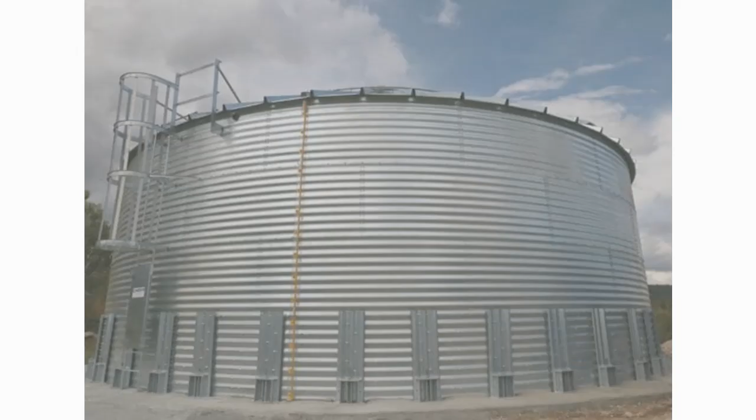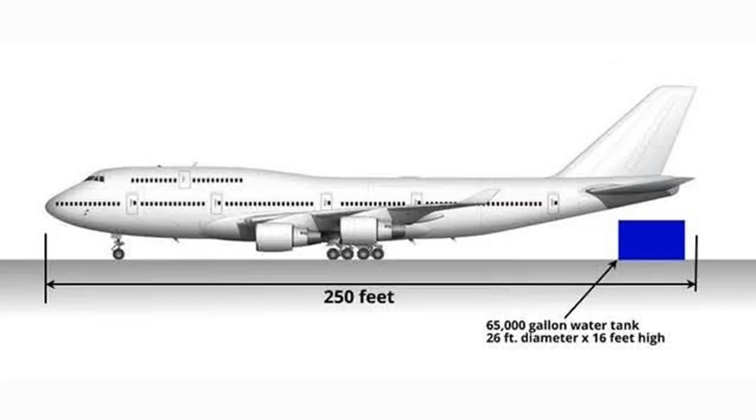I'd like to address this myth about aircraft not using fuel, specifically commercial airliners, and set the record straight using real world examples, references, videos, and a bunch of other proofs that seem to be overlooked when discussing this topic.

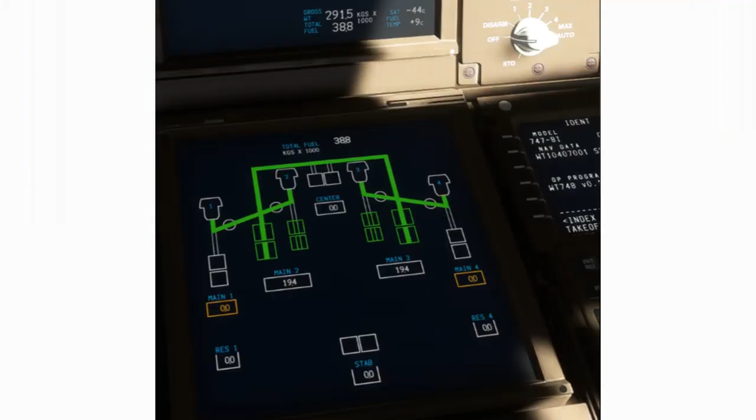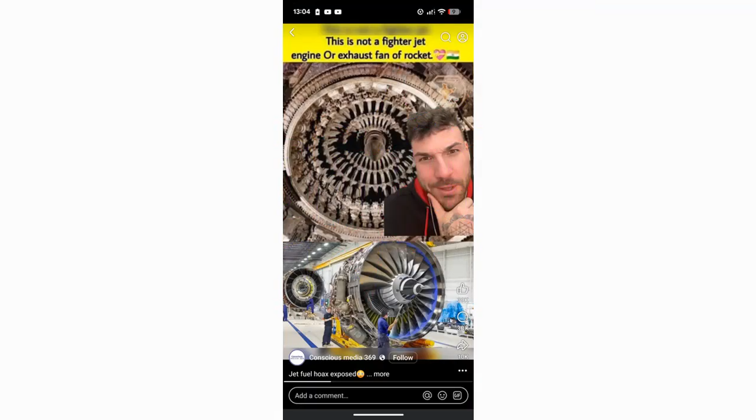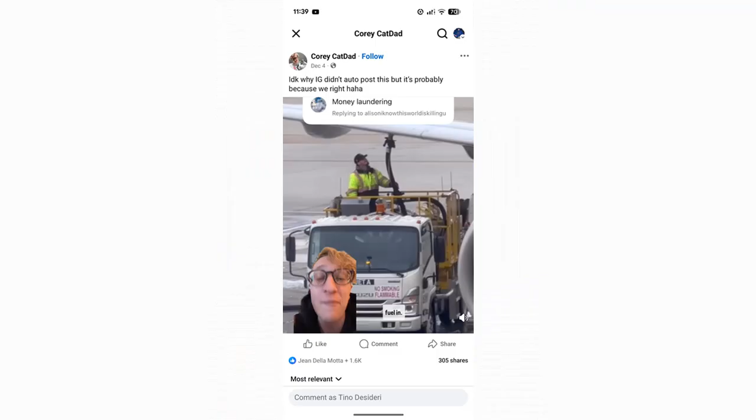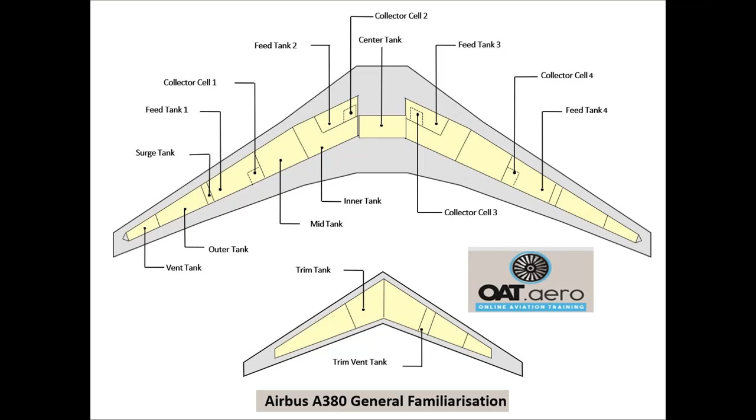I've picked these four individuals not because there's any hardship between us. I actually follow some of them and agree with most of what they're saying. But I've picked them because they're very prominent in my feed, and I'm concerned that the message they're propagating is reducing their credibility for other messages they're trying to get across. I'm also concerned that some of them may be controlled, deliberately trying to discredit other messages we're trying to put out to help others. After watching this video, I hope they'll reach out to me because I've tried contacting them privately through messages or commenting on their posts. However, nobody has responded to me.

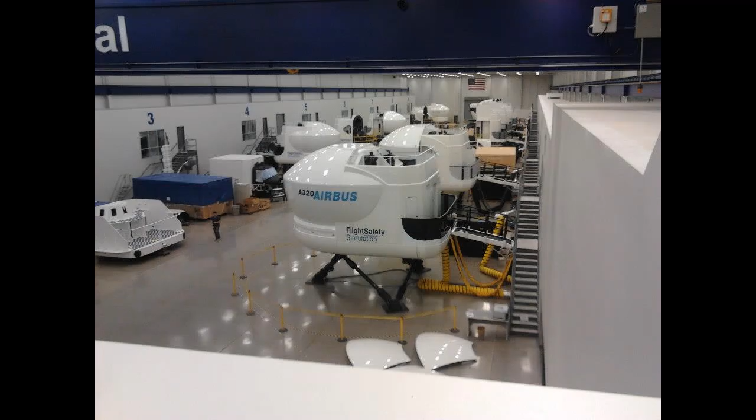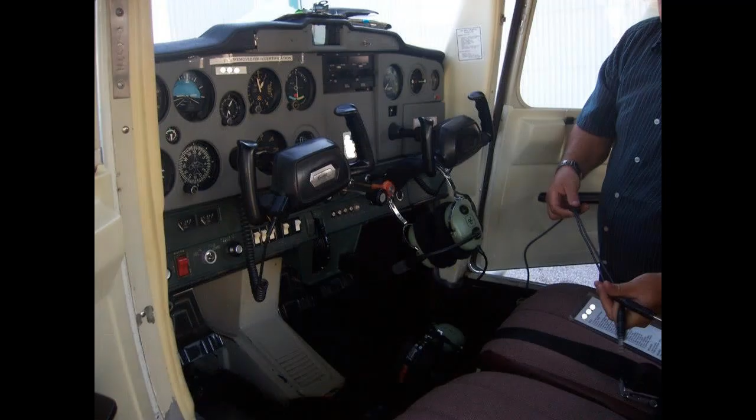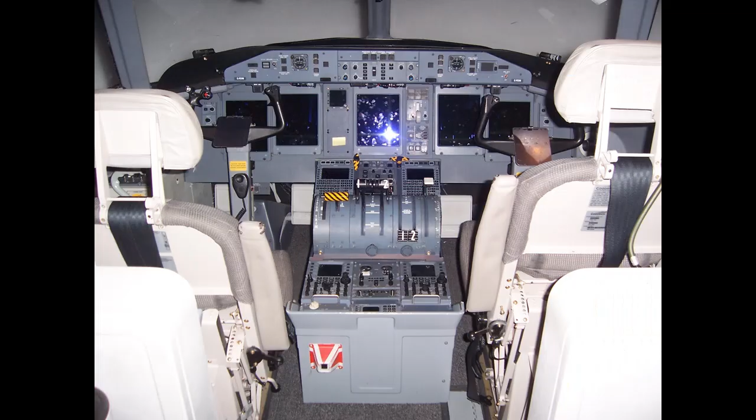I do have quite an extensive aviation background. My background is electronics engineering with a very strong mechanical background, and more importantly, I have avionics and flight training experience at the airline transport category level. Now, I'm not a pilot, I don't have a pilot's license. However, I was trained by military and commercial airline pilots when I worked at a flight center where they trained pilots to do the job that they do, taking you around the world to your favorite vacation destinations. So yes, I have formal pilot training at the commercial airline level, and I did that for about 5 years as a level D simulator technician. I've also flown a Cessna 152 and a Piper Archer 2, so I do have experience flying. And I've also been very close with the maintenance room and seen turbojet engines, turboprop engines, fuel lines, and also know quite a bit about the industry.

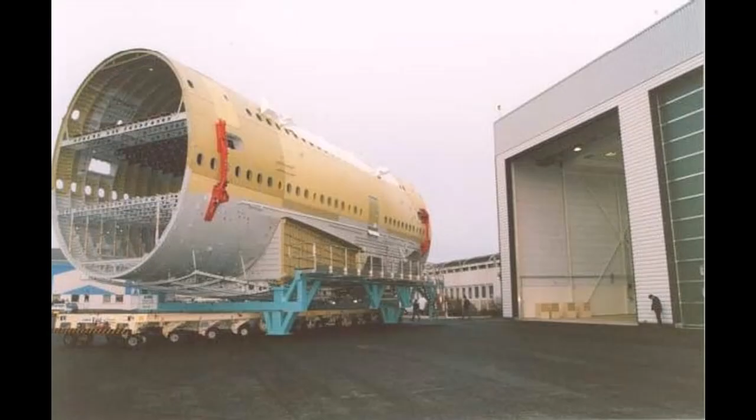So this is going to be a very long video. I'm going to attempt to answer the myths or debunk the myths in the first 5 minutes, and then the remainder of the video will go into depth with examples, calculations, and video proofs. I hope that if these gentlemen see this video, they'll reach out to me. Again, there's no hard feelings here. I just want to know who is on par with getting proper information out to the public.

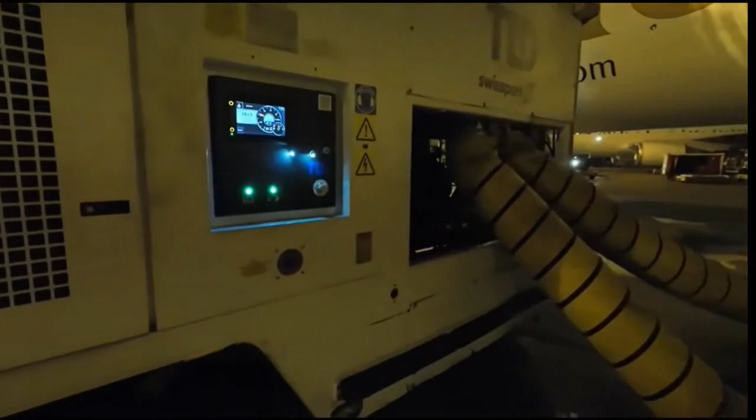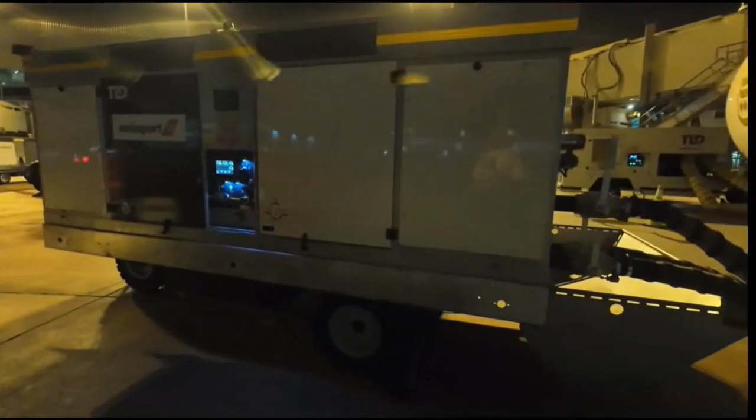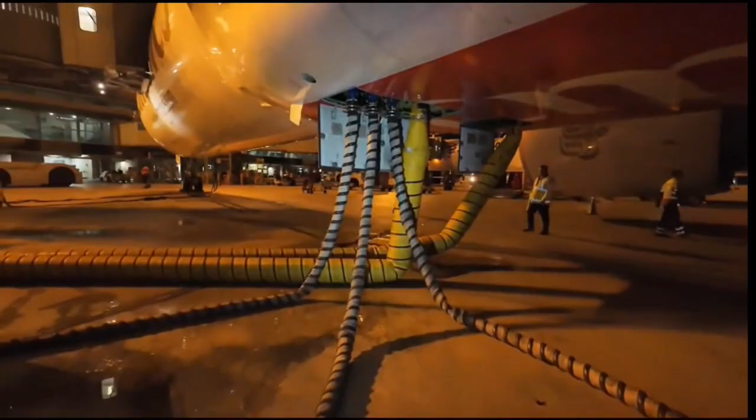I'd like to begin with the first myth that I believe started from a misconception of how a jet engine is started. We're going to go to something more common to all of you, your vehicle's car engine, and how it starts. The first question I'm going to ask these four individuals is, how does your vehicle engine start? What mechanism and what energy is used to initially start your car's engine? And if you said fuel, you would be wrong.

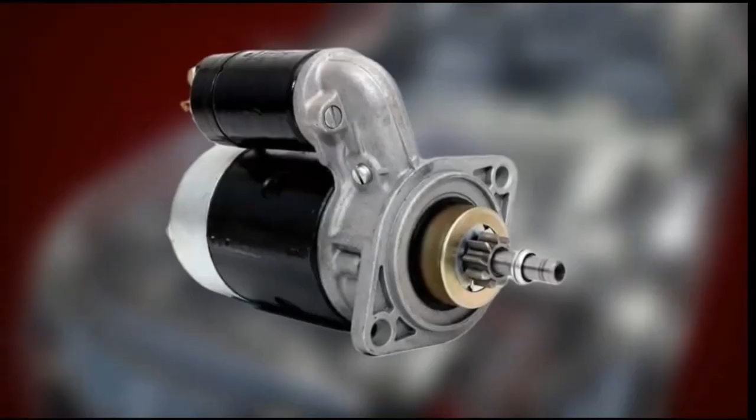Surprisingly simple, yet immensely powerful device, the starter motor. This thing is the heavy-duty muscle that turns your dead engine block into a purring machine. But have you ever stopped to think about what actually makes that happen? It's not the fuel, it's not the spark plugs, and it's definitely not the battery alone. It's this compact, surprisingly simple, yet immensely powerful device, the starter motor. This thing is the heavy-duty muscle that turns your dead engine block into a purring machine.

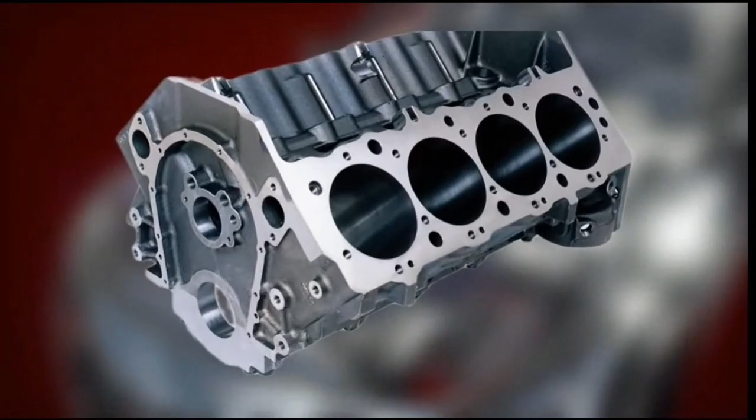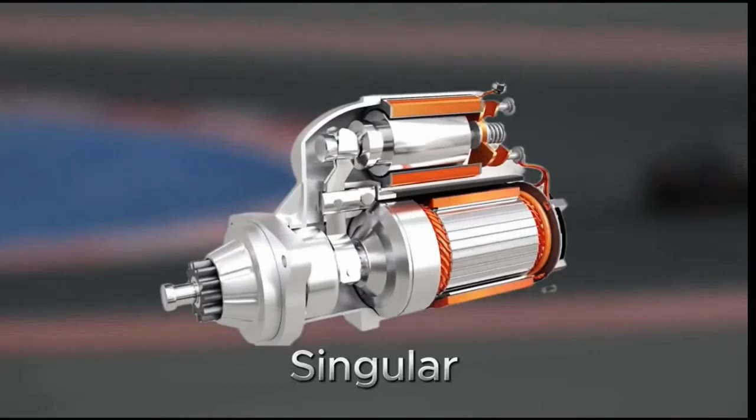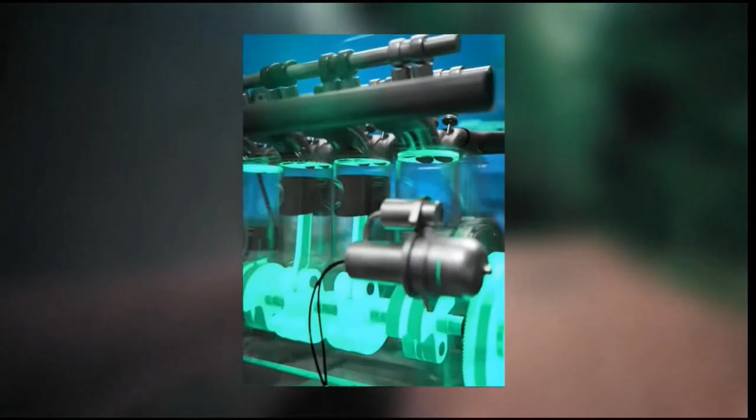Here's the deal. Your engine needs to be turning at a decent speed, about 100 to 200 revolutions per minute, or RPM, to suck in air, compress the fuel, and fire up reliably. Problem is, when your car is off, the engine is just a big, heavy, inert chunk of metal. It has no power of its own. The starter motor's function is singular: to draw a massive burst of power, hundreds of amps from the battery, to provide that initial, heavy, forceful rotation. It's a temporary, heavy-hitter electric motor designed for one job only, to crank the engine until it can fire on its own power.

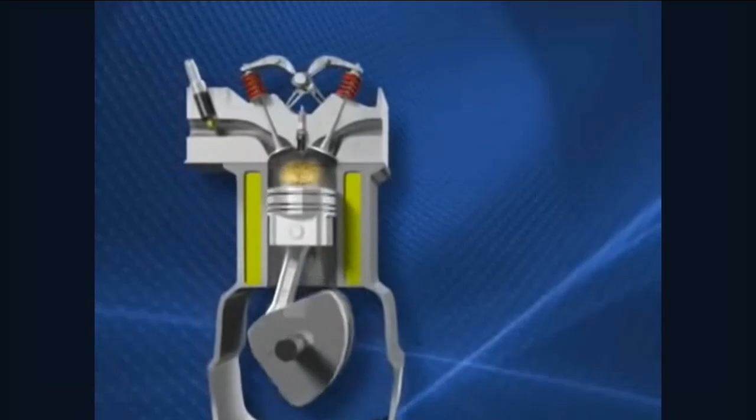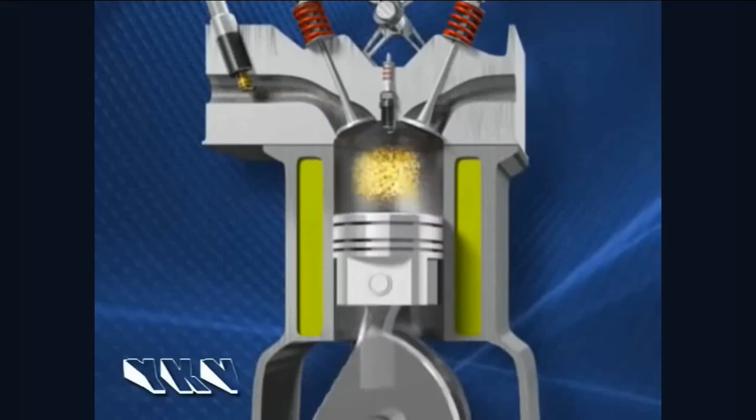So if you didn't already know, now you do. The vehicle engine requires electricity, voltage and current from the battery to turn the starter motor in order to move the pistons, create compression and heat to light off the fuel mixture. You simply cannot just light off the fuel in the combustion. That's why you have the timing of the spark when the piston is almost at the top, which lights off the fuel. The amount of time for the fuel to expand after the spark happens pushes the piston down, and the cycle continues.

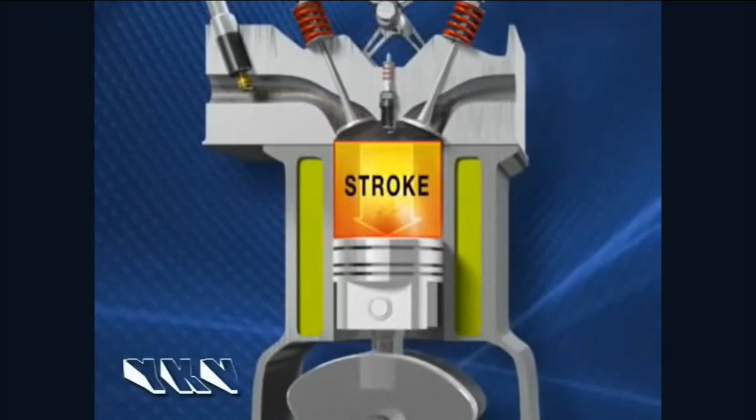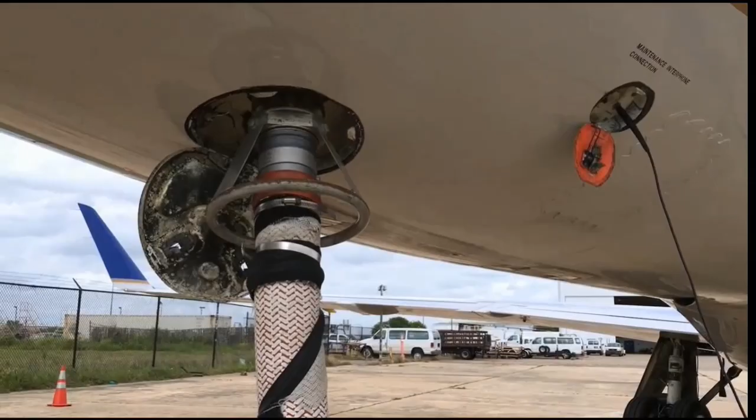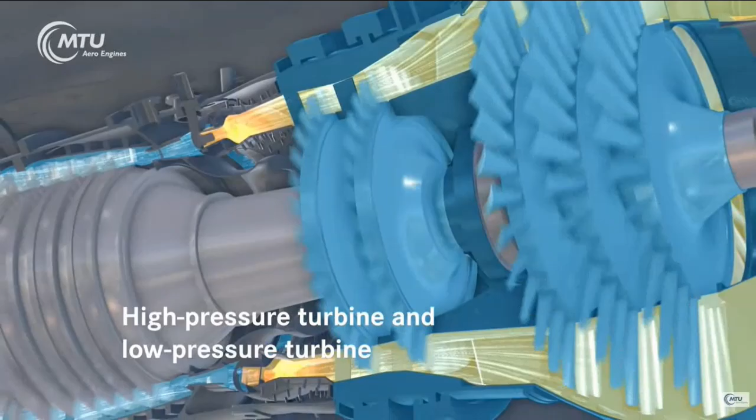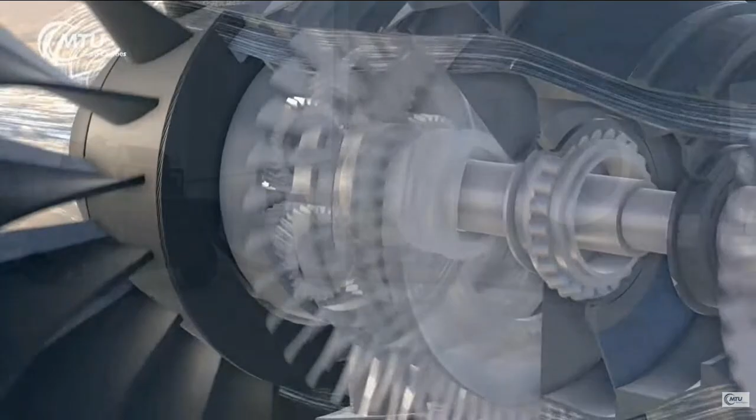Now with a jet engine, it's relatively the same, but we don't use electricity per se. We use compressed air to spin the turbines to create compression and heat in the combustion chamber in order to light off the fuel mixture. So I think that's where the misconception comes in, where people think airplane engines run on compressed air. No, they don't. They require compressed air to spin the turbines to create compression, which is required. So this myth about engines needing compressed air or running on compressed air is totally blown out of the water, because somebody saw an air cart fire up a jet engine and assumed it just ran on compressed air, not realizing you need to create the heat and compression in order to light off the fuel mixture.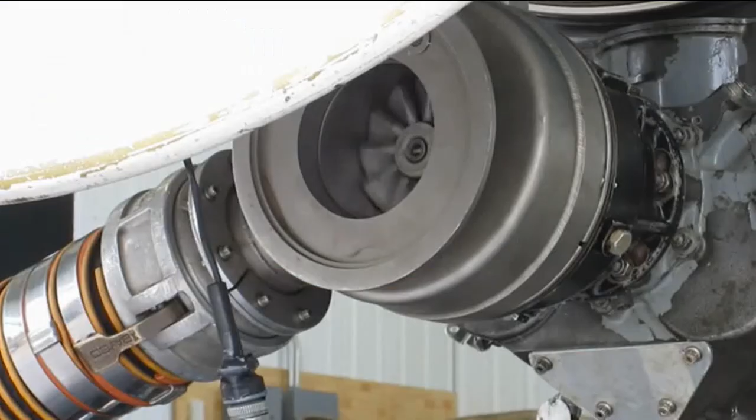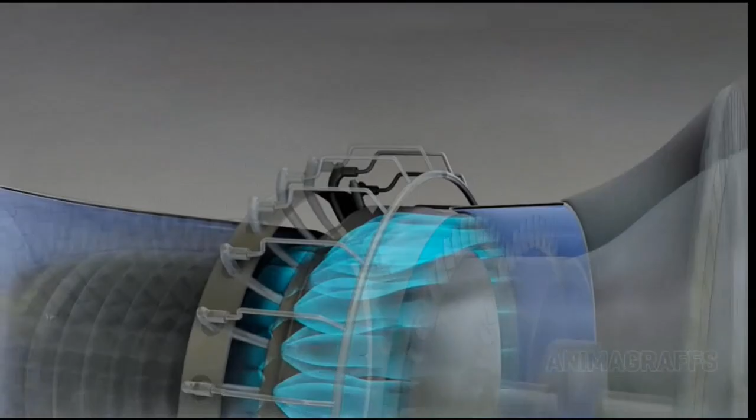The compressed air is used to spin the turbine blades initially, before the fuel is introduced into the combustion chamber so the jet engine can start, through the combustor, releasing a jet of super high-powered gas. The design shown here is an annular combustor, meaning ring-shaped.

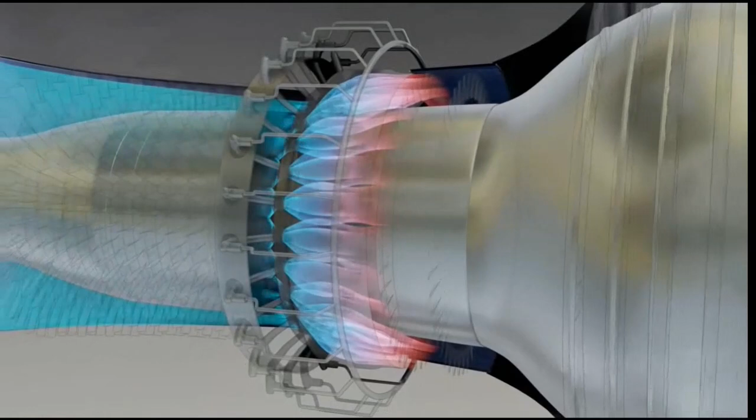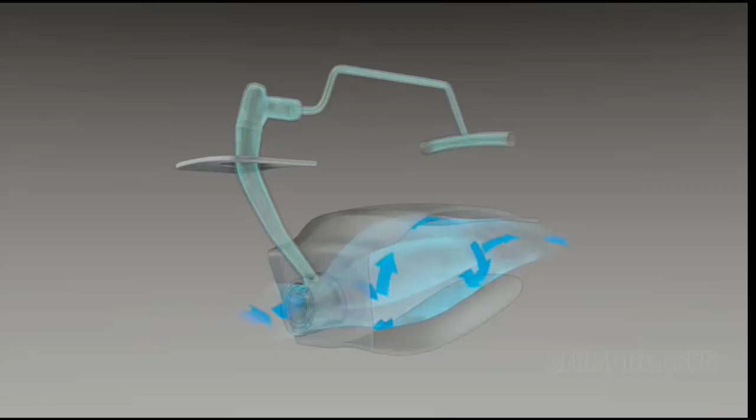Compressed air enters the inlet nozzles. Each nozzle is coupled with a fuel injector and is designed to swirl the incoming fuel and air for an even mix, along with a couple of igniter plugs.

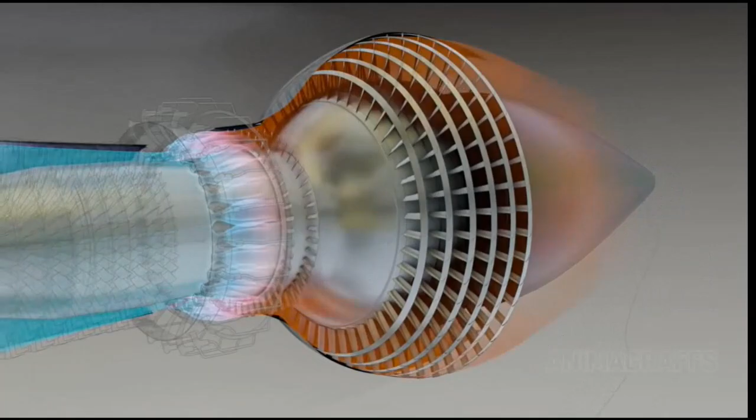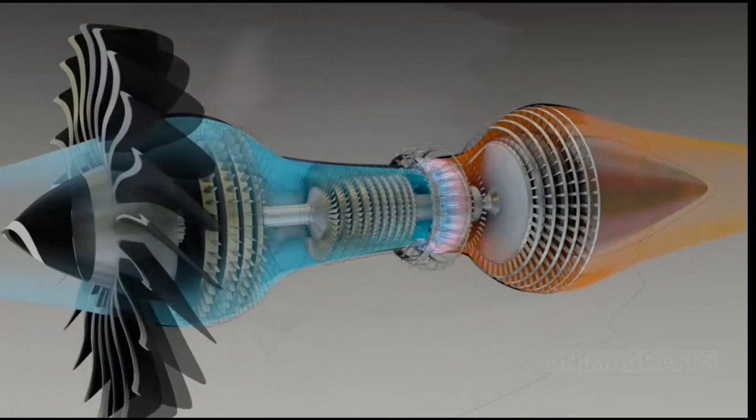While we're discussing turbofan engine design, let's discuss a couple other myths surrounding this topic. One: why isn't the air exiting the engine hot enough to burn people standing behind the airplane, for instance on a beach while they watch the airplane take off? The other: why can't we see flames coming out the back of the engine?

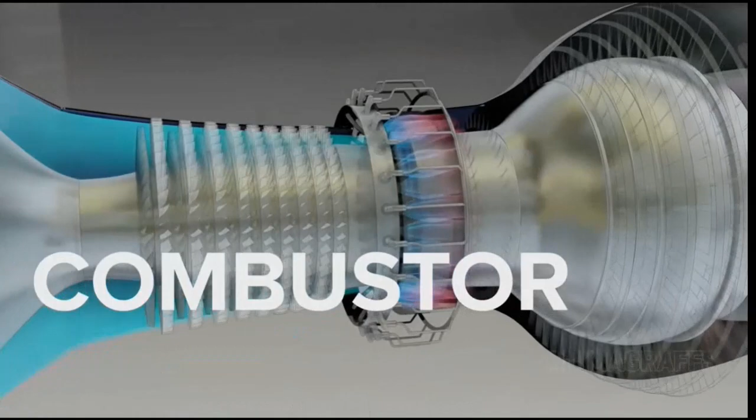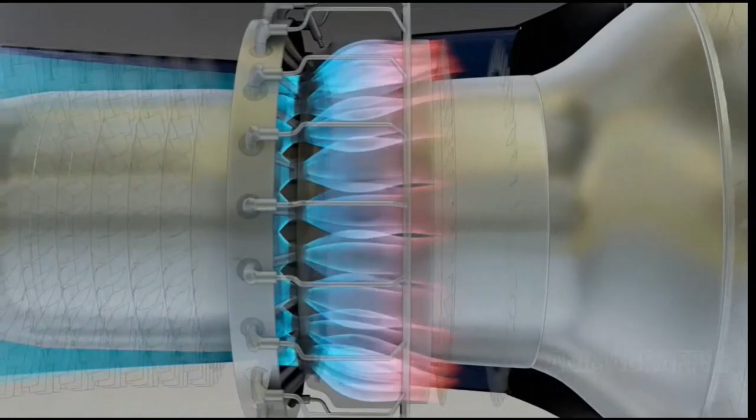Let's start with that one. That's because the jet engine has a combustion chamber which contains the flame, and that is used to efficiently move the turbine blades to spin the incoming air through the engine to create thrust. If that heat was escaping out the back of the engine, it wouldn't be enough to turn the turbine blades in order to create that thrust.

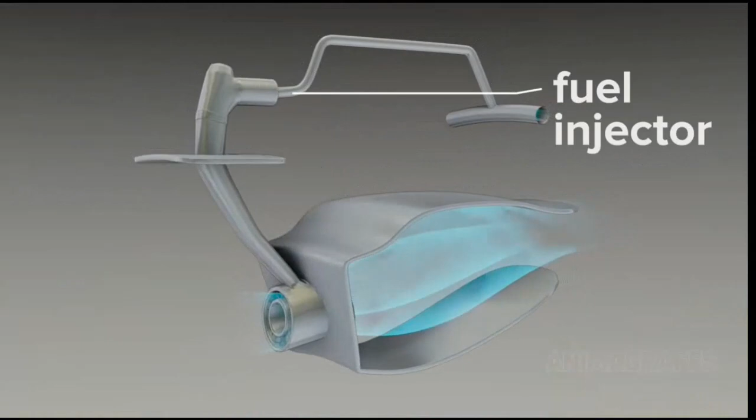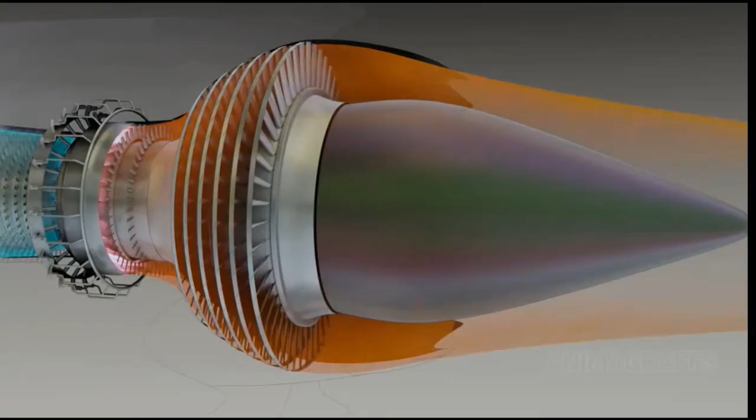So that is why all that heat is contained in the combustion chamber, so it can be forced through the blades of the turbine. Just like your car engine has a cylinder, it contains the air-fuel mixture, the ignition, the expansion, so all of that energy can be used to move the piston. If it was escaping out the exhaust, then your car wouldn't move very effectively.

So that's why you can't see flames shooting out the back of the engine, except for a couple instances like when there's a compressor stall, engine fires, or during the initial light-off when the air-fuel mixture is not optimal, you can see a little bit of flame shooting out the back.

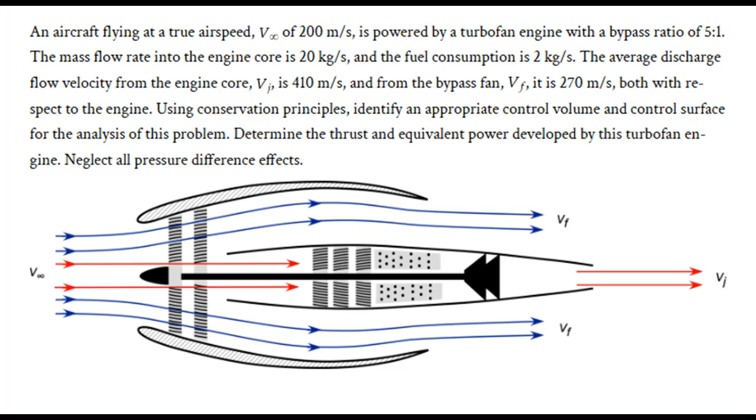Going back to the people on the beach, they're not getting burned because of the design of the turbofan engine. It's also referred to as a high bypass system, which means most of the air going through that engine is getting directed around the turbine section to create the thrust.

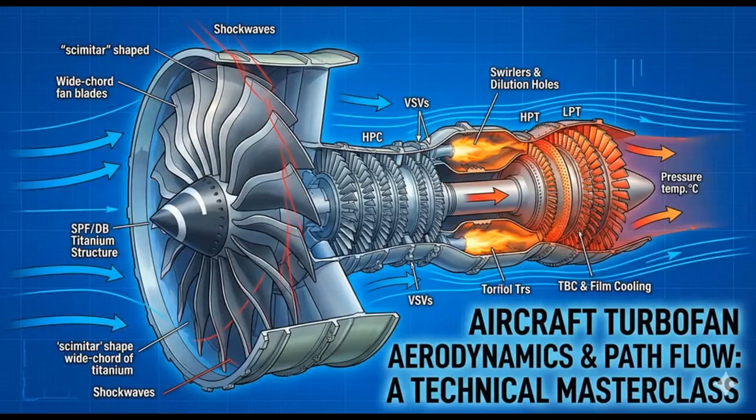There's approximately 20% of that air getting used for actual combustion to drive the engine and make the thrust. If it was the other way around, there wouldn't be enough thrust produced to move a multi-ton aircraft. It's sucking in cold air from the front, and 80% of that air mixed with a little bit of exhaust heat gets cooled.

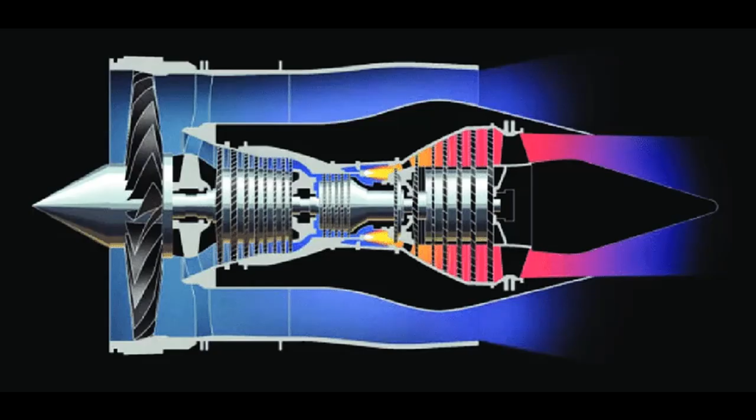The heat dissipates as the air moves faster, plus the distance from those people on the beach to the actual engine also dissipates heat through the atmosphere before it reaches a few hundred feet back. You're not going to feel that heat. You're going to feel the pressure.

In the next video, I'm going to discuss the fuel capacity, the fuel weight, and this nonsense about aircraft using energy from the upper atmosphere. I'm also going to ask some very hard questions about how these, well, I call them no fuelers, no fuel for airplane use. That's how I came up with that term.

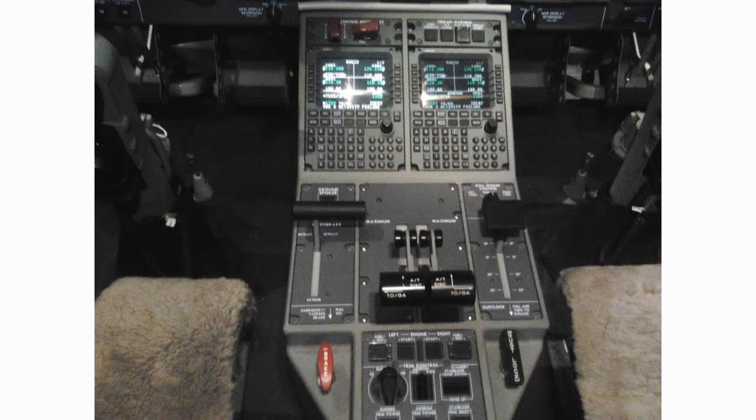I want to ask these no fuelers how the aircraft is controlled by the pilot if it's using energy from the atmosphere, what buttons and levers control the thrust and that sort of thing, and where all these air compressors are hiding and why you can't hear the air compressors in the airplane.

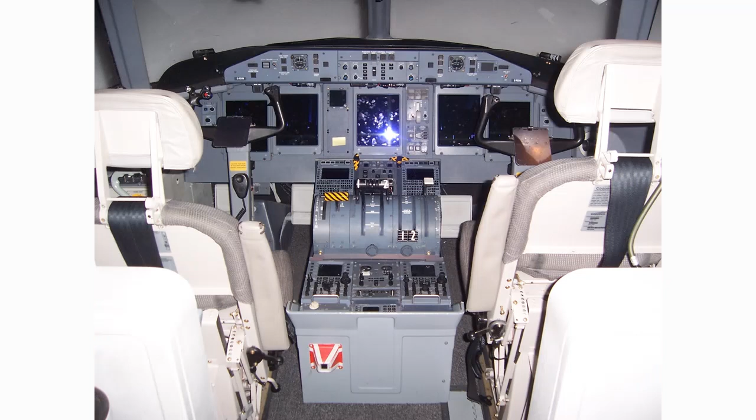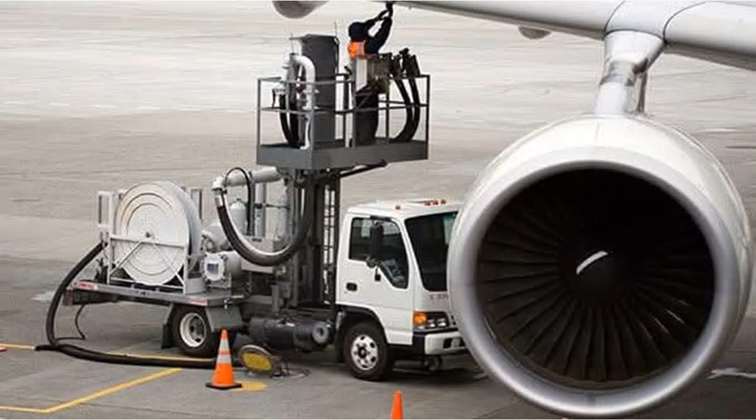Where are the pipes forcing this compressed air to the engines, if you're one of those that believe airplanes run on compressed air? There's so much nonsense, it doesn't even make sense, and I haven't even seen a theory or a drawing or any proof supporting their theory of how this upper atmospheric energy can be harnessed, used, and controlled by the pilot, or how compressed air works. What's driving the compressor?

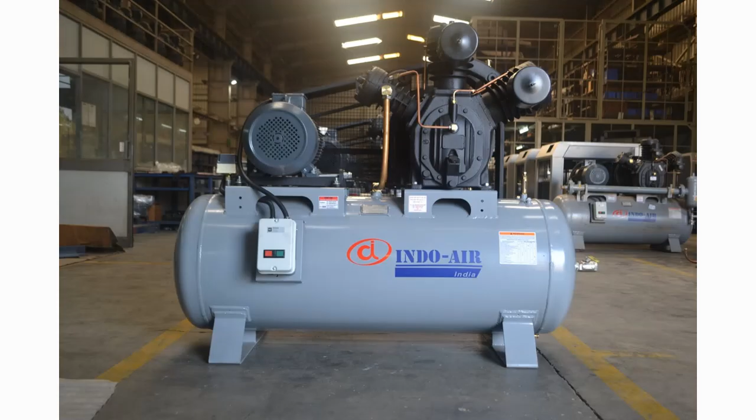What energy is allowing the compressor to compress the air? Is it batteries? Is it fuel? And if it's fuel, why not just use fuel to run the engine? It's so ridiculous, I had to make this video.

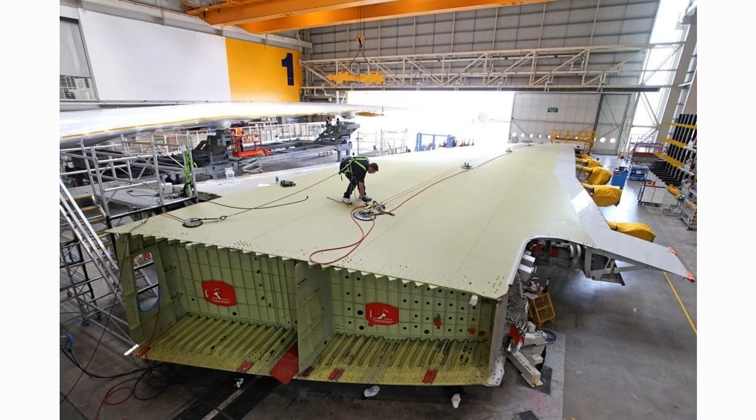I'm looking forward to part 2 of this video, and looking forward to speaking to one or all of them live so we can discuss this. I want to be able to hear their support for their theory and their thought process, because none of it makes sense. It's quite ridiculous, actually. It's embarrassing, sorry to say.